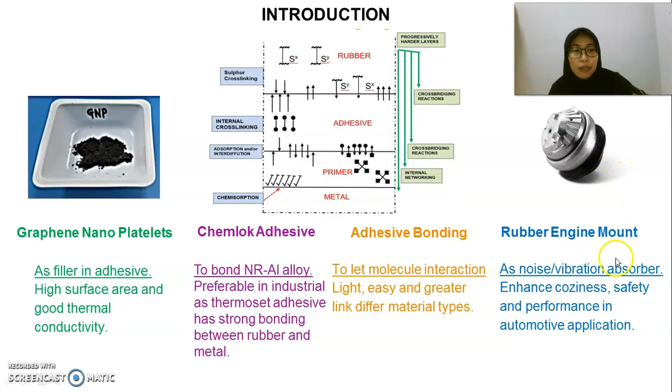Next is the problem statement. I would like to highlight how the problem statement links to the solutions. Firstly, recent automotive demand from consumers: the latest demands in automotive are for better performance, better consumer experience, and better safety, as stated by Fentahun et al. 2018. One example of a vehicle part is the rubber engine mount, used to reduce noise and vibration.

Secondly, the significant use of lightweight vehicle components. The utilization of aluminum alloy may reduce load transfer and improve fuel consumption. Thirdly, the current system provides insufficient bonding between natural rubber and aluminum alloy. Therefore, studying a new adhesive system between these materials is critical.

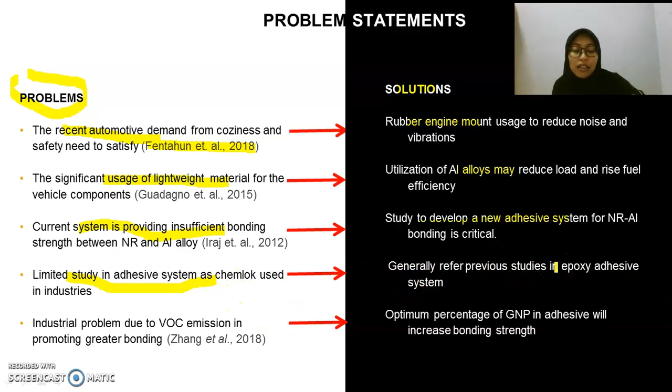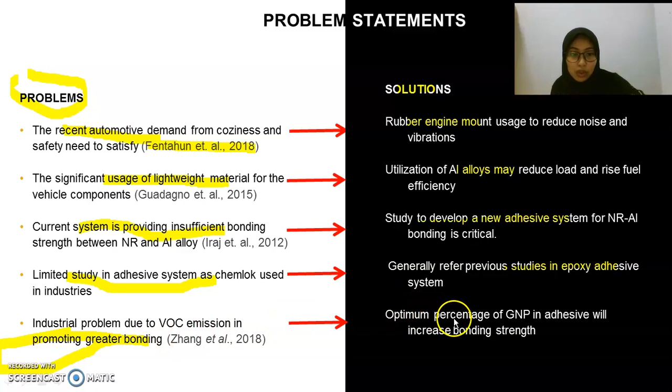Next, there is limited study of adhesive systems such as Chemlok used in industries. Generally, I refer to previous studies on epoxy adhesive. Another issue is industrial problems due to VOC emissions from primer usage. To promote greater bonding, not only primer usage but also GNP adhesive is used to form nano adhesive.

Next part is objectives and scope. The study has four objectives: to prepare the modified Chemlok adhesive by ultrasonication method; to evaluate bonding strength of the adhesive using the peel test; to correlate natural rubber-aluminum alloy bonding strength with morphological properties by SEM, structural properties by XRD, and thermal properties by DSC; and lastly, to synthesize the effect of primer in modified Chemlok adhesive.

The scope of study is divided into raw materials (natural rubber, aluminum alloy, Chemlok 205/220), the methodology part (preparation of samples and vulcanization process using hot press compression), and lastly testing, which involves mechanical testing, morphological analysis by SEM, thermal analysis by DSC, and structural analysis by XRD.

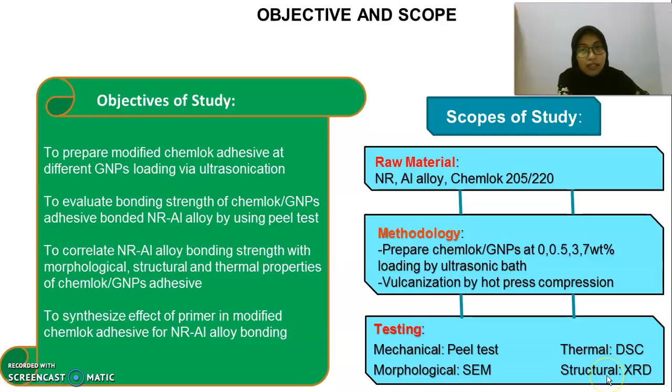Next, the literature review. I will compress the literature review into 6 main parts: automotive application, rubber compound, aluminum alloy, rubber-metal bonding, adhesive system, and graphene nanoplatelets.

In automotive application, as stated, the demand is for greater performance and coziness. The engine mount is one vehicle part that fulfills this demand by removing unwanted vibration levels, as stated by Salim.

Then, the use of lightweight materials: lightweight gives better performance by reducing load transfer and improving fuel consumption. An example of lightweight material combination is rubber compound and aluminum alloy. The rubber compound has superior damping properties and is used to create mounting and suspension.

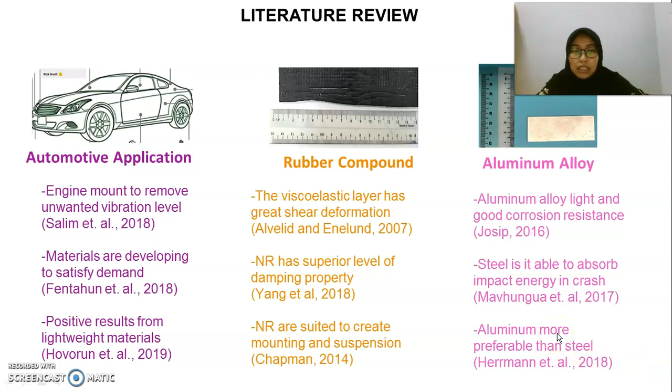The rubber does not work alone; it is combined and linked with aluminum alloy. Aluminum alloy is chosen for being light and corrosion resistant, as stated by Mavhungua et al. 2017, while steel has better absorption of impact energy in a crash or accident. However, Herrmann concluded that aluminum is preferred over steel since steel is heavier.

So the aluminum alloy and natural rubber combine through rubber-metal bonding, with the engine mount as an example. A good combination creates unique properties combining rubber flexibility and metal stability, as stated by Iraj et al. 2012, achieved by joining the two different parts using an adhesive system.

Adhesive systems are preferable over mechanical fastening due to their benefits and important role in cars. The adhesive also works to increase bonding strength between the two different parts. GNP will be inserted into this adhesive system because it has higher surface area, creating superior interaction between molecules in the bonding. The effect of nanocomposite adhesive systems was proven by Jojibabu et al. 2020.

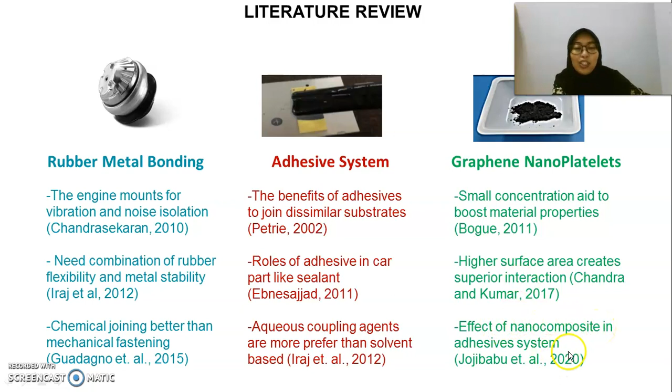Next, the methodology part. This is an overview flow chart: firstly, aluminum surface preparation using sandblasting to roughen the surface, allowing mechanical interlock between the adhesive and the adherends.

Step 2 is GNP preparation by ultrasonic bath, which functions to agitate GNP nanoparticles. Graphene exists layer by layer, but it will disperse if agitated at proper times and temperatures.

Step 3 is adhesive preparation: insert the GNP into Chemlok 220, then apply the first layer of Chemlok 205 as primer, then apply three layers of modified Chemlok 220. This modification will achieve objective 1.

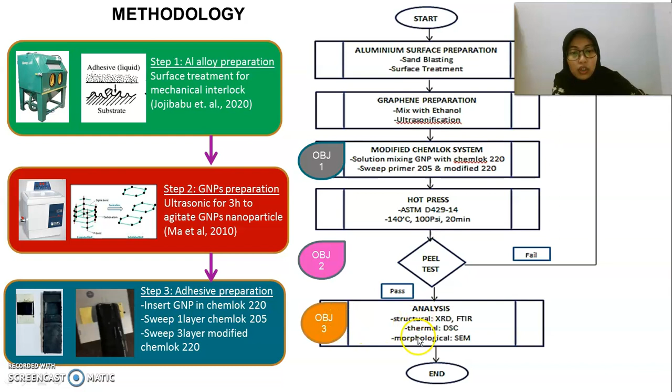After the sample is prepared, we vulcanize the parts by hot press with the ASTM D429-14. Then, once the sample is completed, we undergo the peel test for mechanical testing and to correlate between these materials to achieve objective 3.

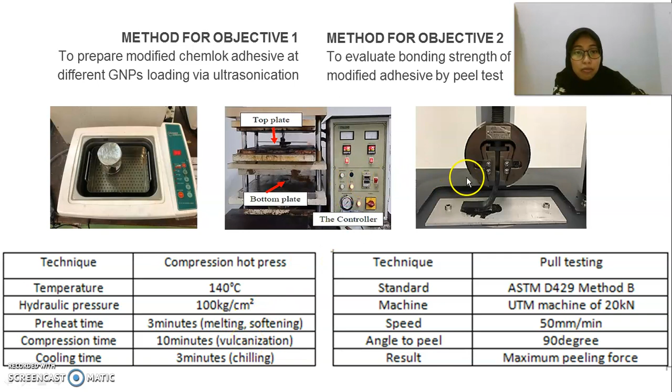Next, the method for objective 1: to prepare the modified Chemlok adhesive by ultrasonication, this is put in ethanol in a beaker, then proceed to hot press compression at 140 degrees Celsius for 10 minutes before performing the peel test to achieve objective 2.

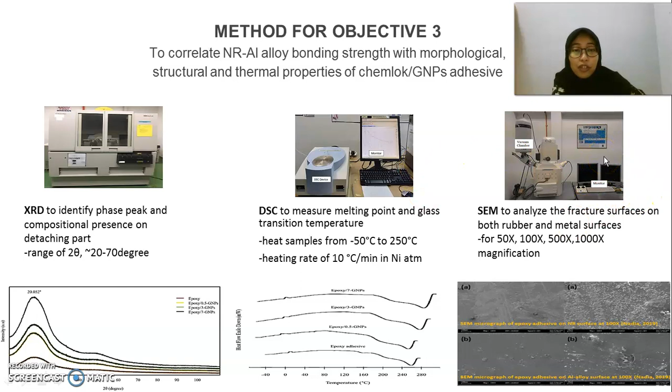The method for objective 3 considers XRD to identify the phase peak, DSC to achieve thermal analysis including glass transition temperature and melting point, and SEM for the fracture surface of both materials. The expected result shows that increasing GNP increases the maximum peel force, showing GNP interaction.

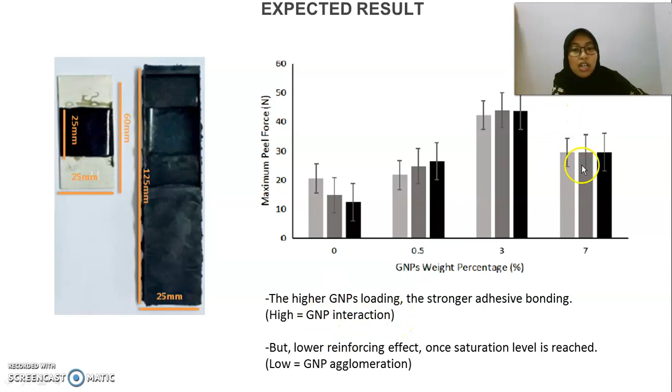However, there is a lower reinforcing effect once the saturation level is reached, showing GNP agglomeration. This is the rubber part dimension, aluminum, and adhesive. With that, thank you.